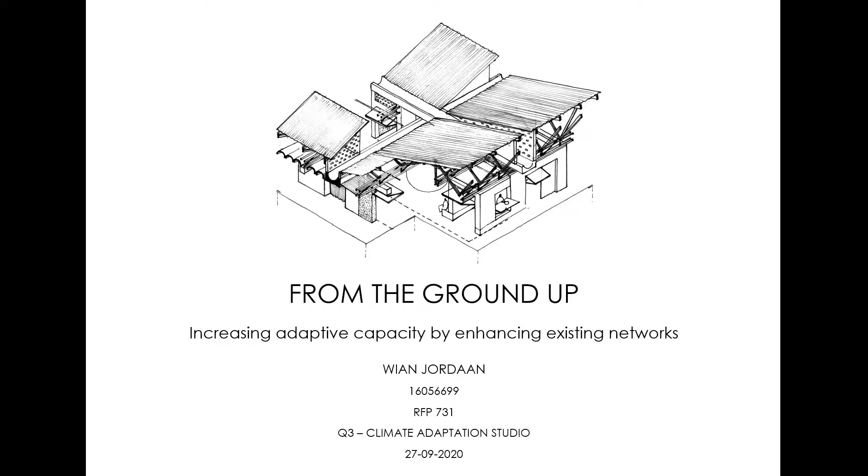Good morning, my name is Jordaan and the project is named From the Ground Up: Increasing Adaptive Capacity by Enhancing Existing Networks. The community of Melusi is highly dependent on external networks to provide economic and social services, which limits the community's capacity to adapt to the hazardous effects of climate change.

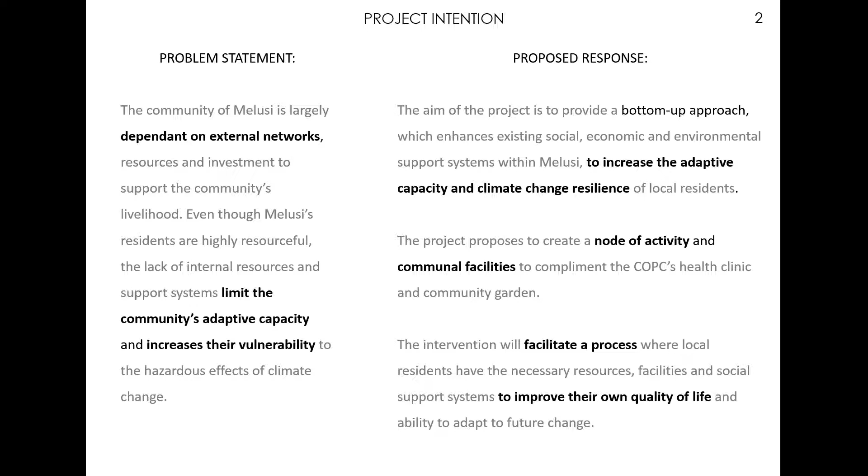The project proposes a bottom-up approach of enhancing existing networks within Melusi to improve the community's adaptive capacity and climate change resilience. The project will create a node of activity supported by communal facilities to facilitate a process where local residents have the necessary resources and social support networks to improve their own quality of life without the need of continuous intervention by external agents.

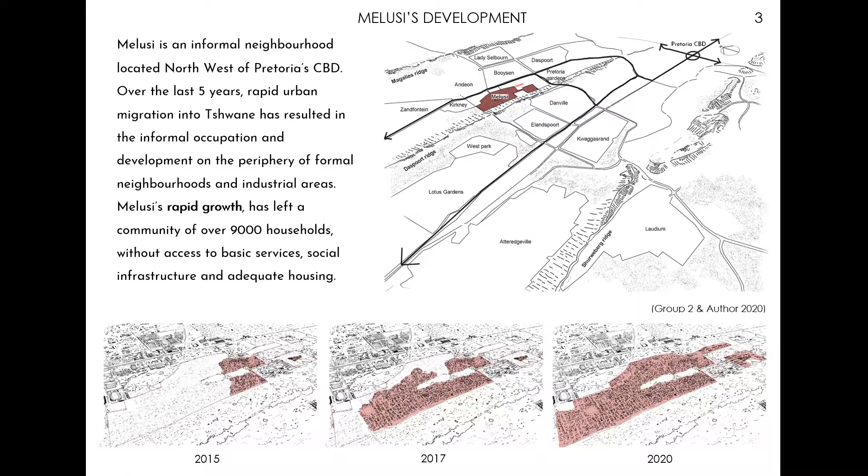Melusi is an informal neighborhood located northwest of Pretoria CBD. Over the last 5 years, urban migration into Tshwane has resulted in rapid informal development on the edge of formal neighborhoods. Rapid informal growth has left a community of over 9,000 households without access to basic services, social infrastructure, or adequate housing.

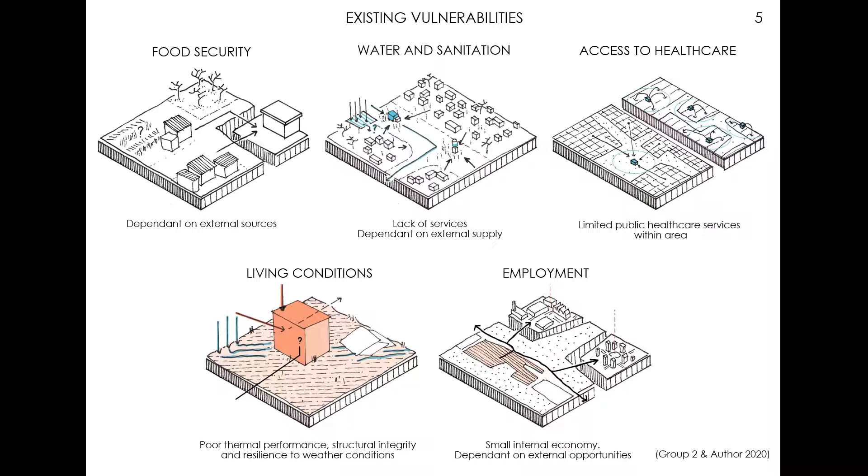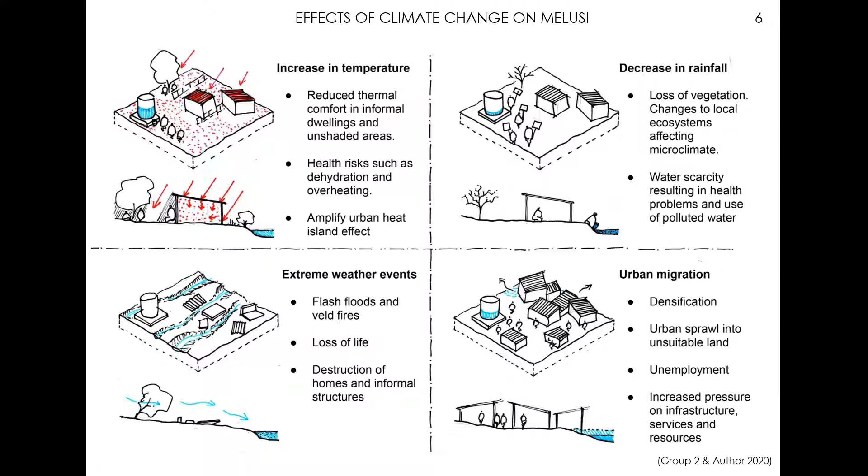Melusi's existing vulnerabilities indicate a high dependence on external sources for basic services and economic opportunities. The dependence on external systems make Melusi less resilient to the effects of climate change. Melusi is ill-equipped to handle the expected increase in temperature, decrease in rainfall, increase in extreme weather events, and increasing urban migration, which will exacerbate the community's existing vulnerabilities.

As a group, we analyzed how the effects of climate change could impact the community's quality of life and how these vulnerabilities could possibly be reduced with strategies such as increased flexibility, diversity, agency, and efficient technology.

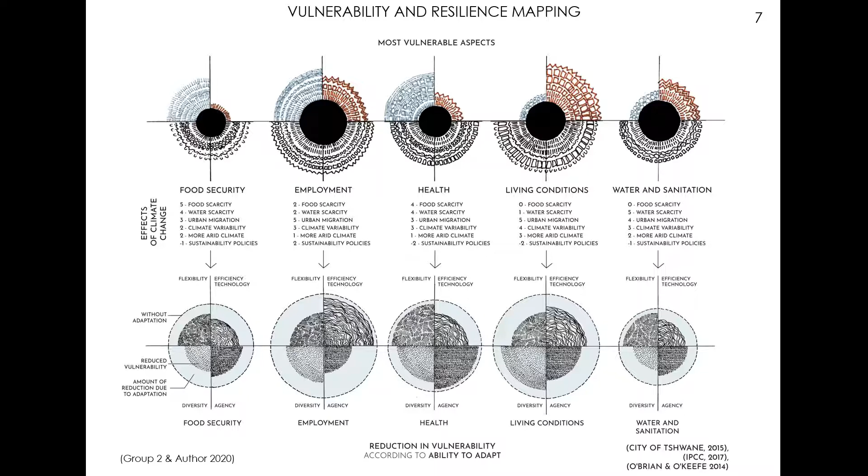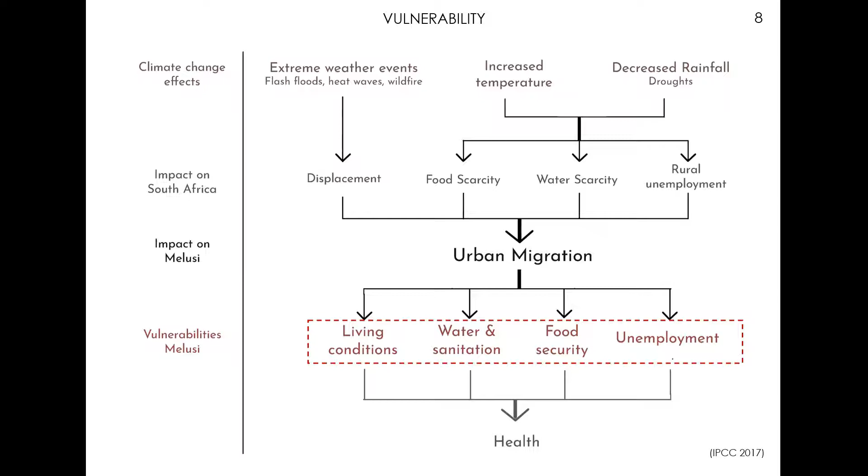The diagram indicates how the effects of climate change on rural communities will intensify the existing patterns of urban migration, which will exacerbate Melusi's existing vulnerabilities, such as poor living conditions, limited access to water, food insecurity, and unemployment. These 4 factors also contribute to health problems.

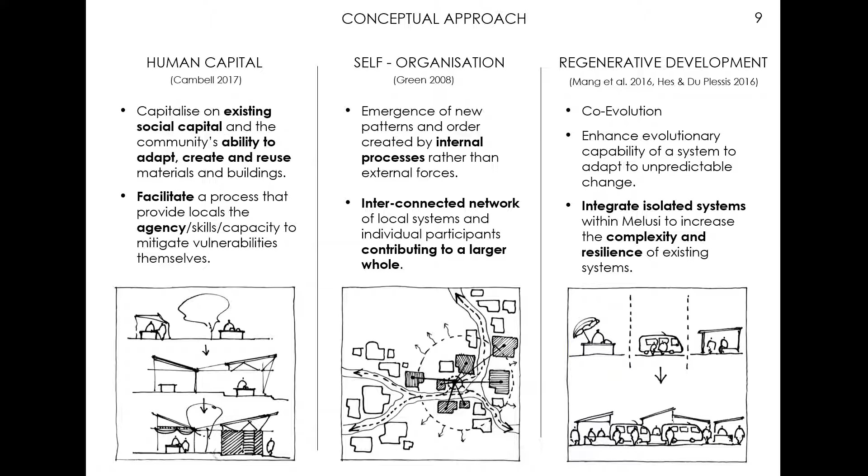The project will use the community's existing social capital and the ability to adapt, create, and reuse to facilitate a process of community agency. The project will focus on creating an interconnected network of internal processes by integrating isolated systems into a more complex and resilient system.

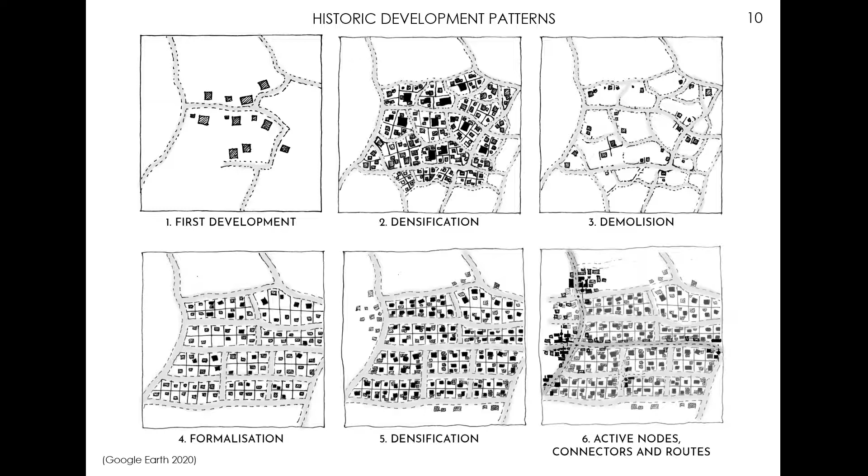An analysis of historic development patterns within Melusi indicated a continuous process of organic development, formalization, and then a resurgence of organic densification. Formalization has increased the informal sprawl and diluted economic and social activity.

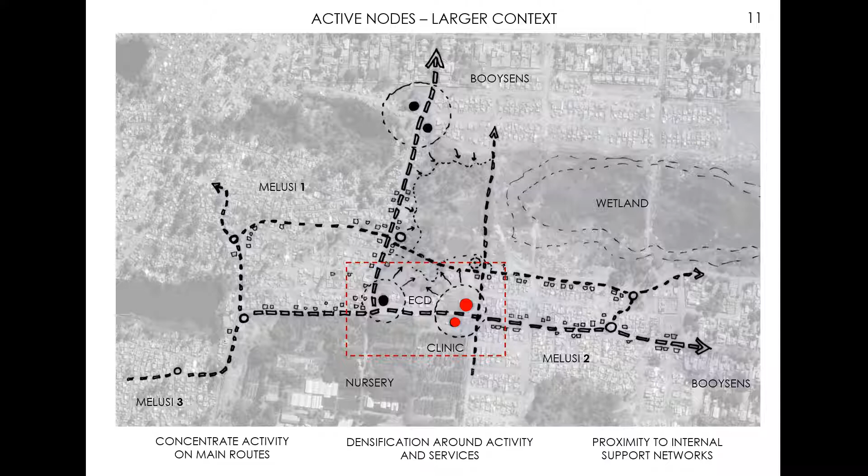The project proposes to create active nodes, routes, and connectors within Melusi to concentrate economic and social activity. This will stimulate densification and increase proximity to internal support networks and services.

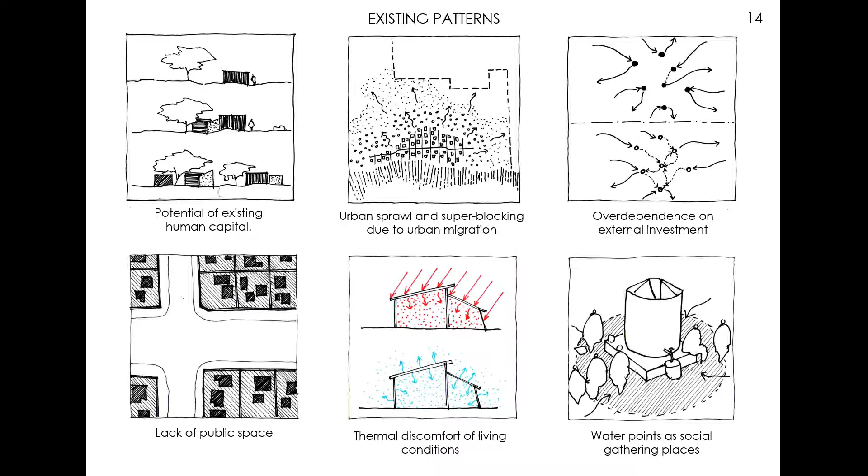The focus area is located at the intersection. This project intends to enhance existing systems such as the use of water points as social gathering places and the existing patterns of agency and appropriation.

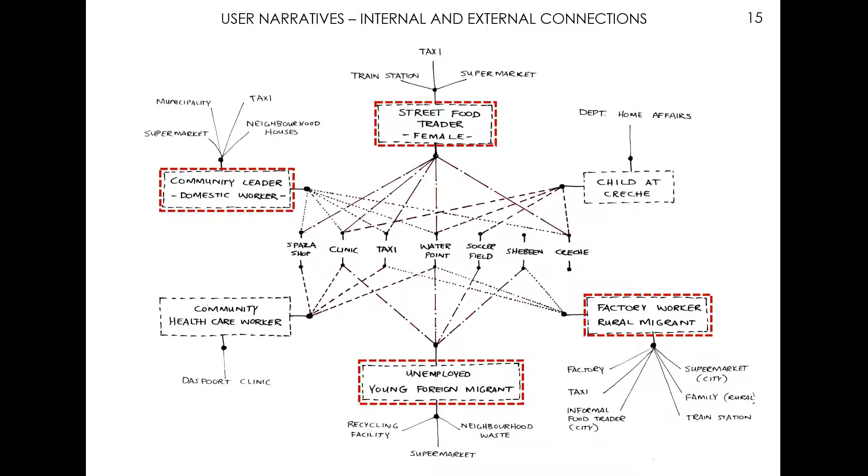The program aims to increase the adaptive capacity of the community by providing communal facilities to stimulate agency and provide support for existing processes. The program consists of 3 parts: community kitchen, a shared workshop, and informal market space.

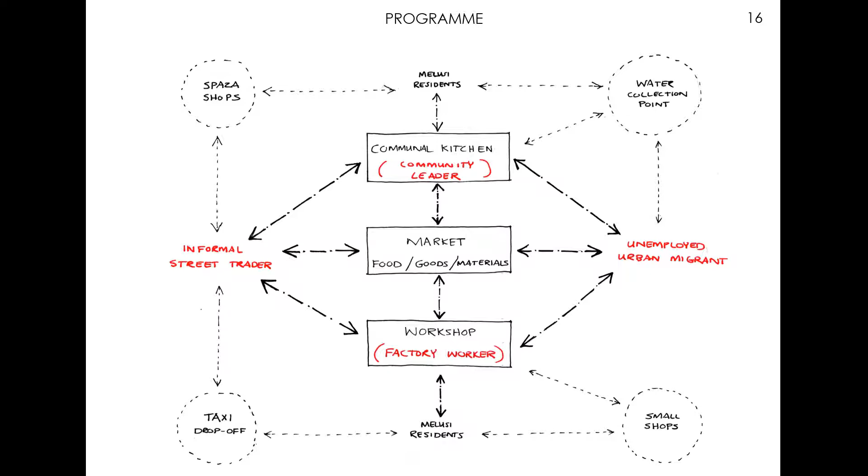These 3 components are supported by water collection points, a taxi interchange, and small spaza shops to integrate existing isolated processes and users into a larger system.

The diagram illustrates how the main components of the program respond to the vulnerabilities identified in the mapping. The identified vulnerabilities will worsen existing health problems within Melusi.

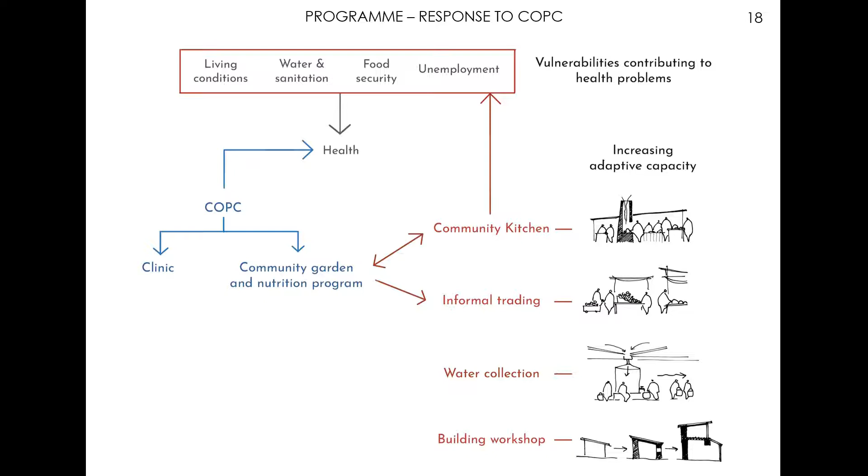The University of Pretoria COPC unit will provide a clinic to improve access to healthcare services. The proposed program provides complementary programs to the clinic and community garden by placing emphasis on addressing some of the underlying factors contributing to health problems.

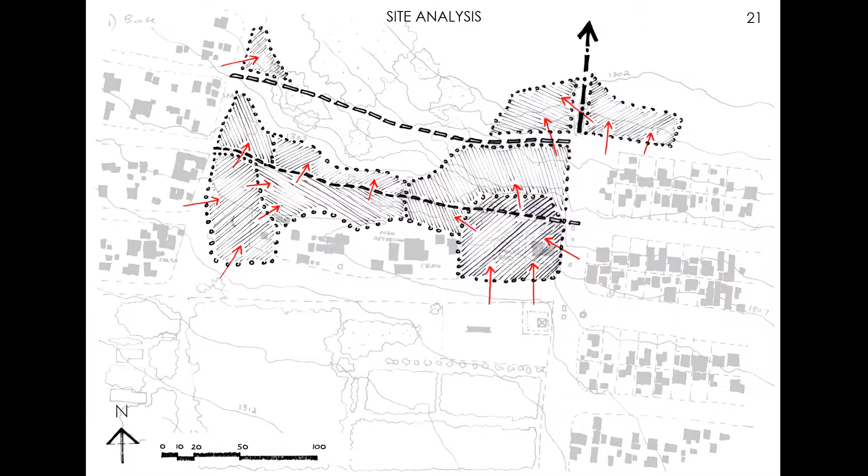A site analysis studied existing nodes of activity, main circulation routes, and expected sprawl due to urban migration. The proposed site will link to existing nodes such as the ECD centers, the clinic, the spaza shops, and water collection points.

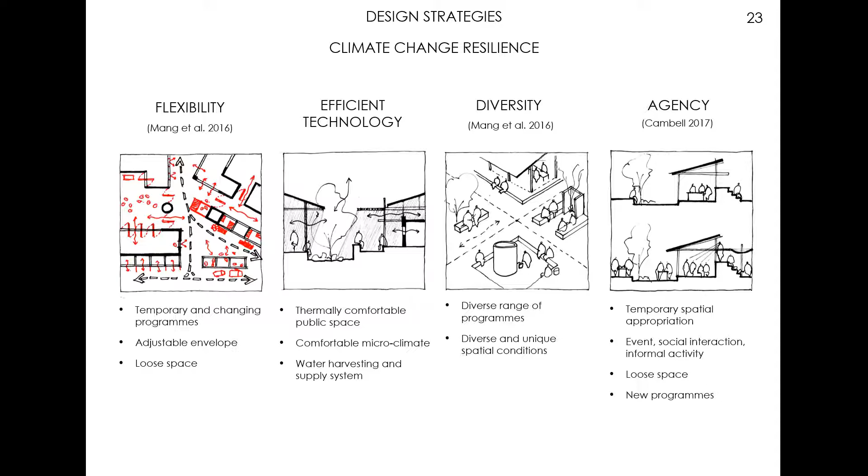The project proposes to increase the flexibility, improve the technology, promote diversity, and stimulate agency to improve the resilience of new and existing systems.

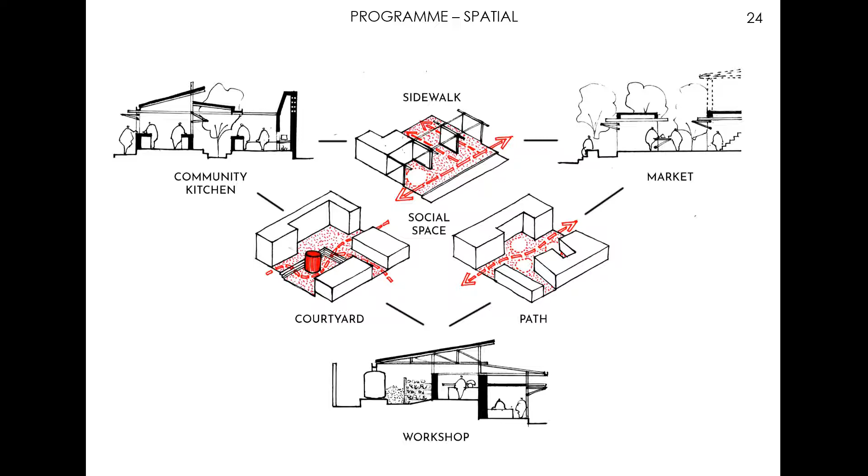Public and semi-public social spaces will link the 3 main programs: the use of courtyards, pathways, and activated sidewalks. The drawing illustrates the master plan.

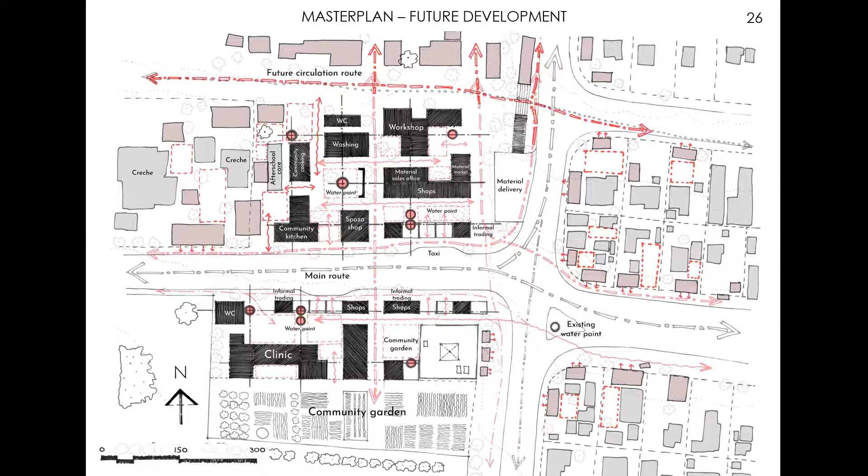The project anticipates future sprawl towards the north and densification around the intersection, which will create new routes and courtyards within the existing fabric. The proposed building system promotes appropriation and user authorship while increasing the thermal comfort to combat rising temperatures.

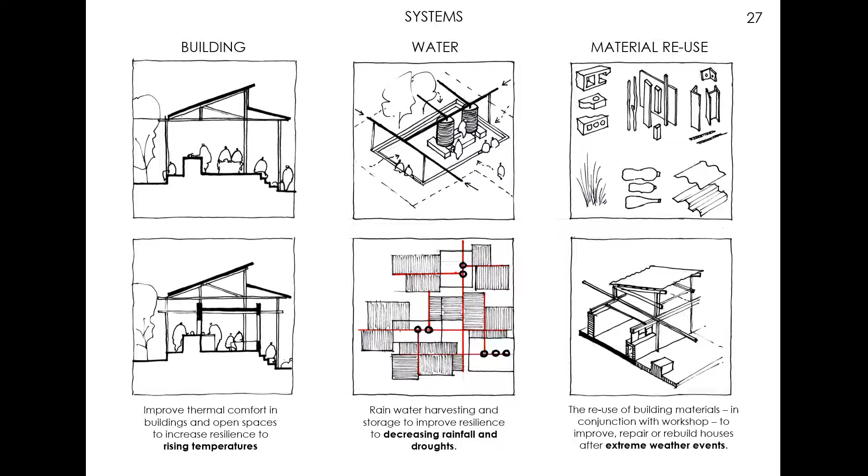The water system collects, filters and stores rainwater to improve resilience against decreasing rainfall and droughts. The project promotes the existing tradition of reusing local building materials to help residents quickly rebuild their dwellings after extreme weather events.

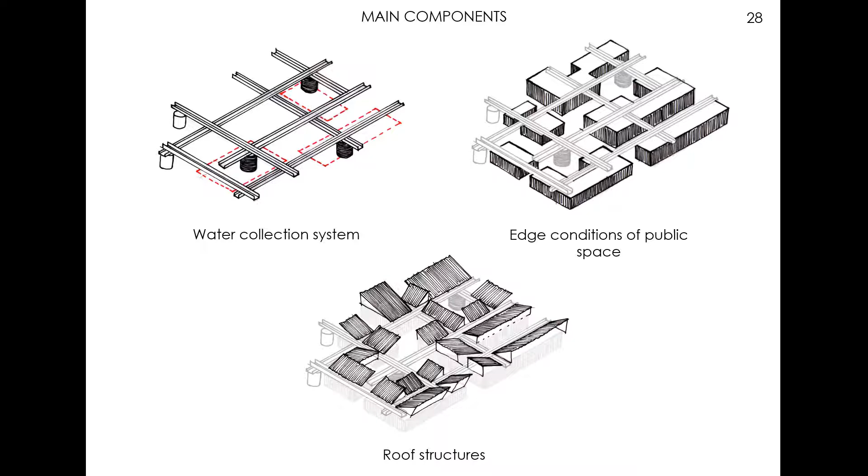The design consists of three main components: the water system with gutters and collection points, the fragmented massing defining the edge conditions of social public spaces, and a series of individual roof structures connected to the gutter system. The plan is ordered around three main courtyards with water collection points.

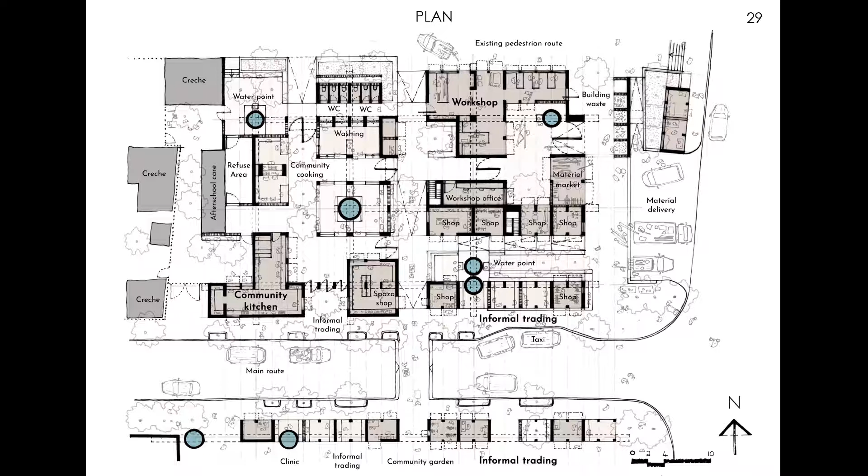The community kitchen links with the street, the courtyards and the ECDs. The workshop links with the courtyard, building material market and a delivery area. Shops and structures for informal traders link to courtyards, pathways and a taxi interchange.

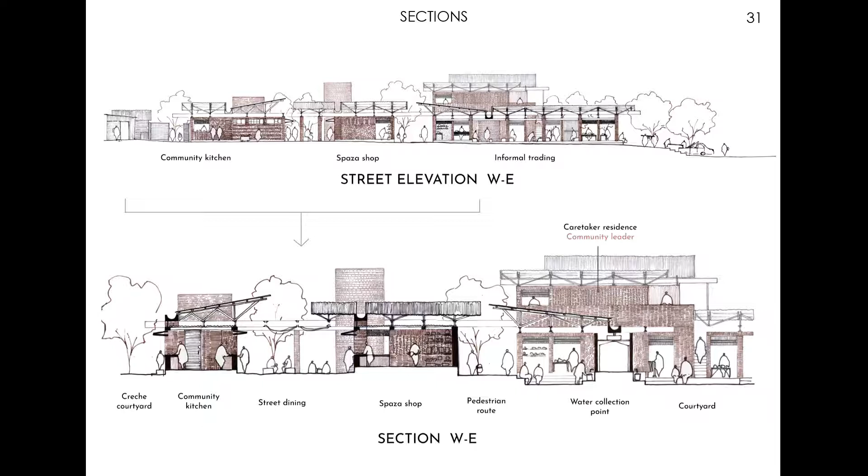The next few pages explore the incremental process of the design and construction process. The architect provides the water collection system, the basic structural support, the steel truss system, and the double roof system.

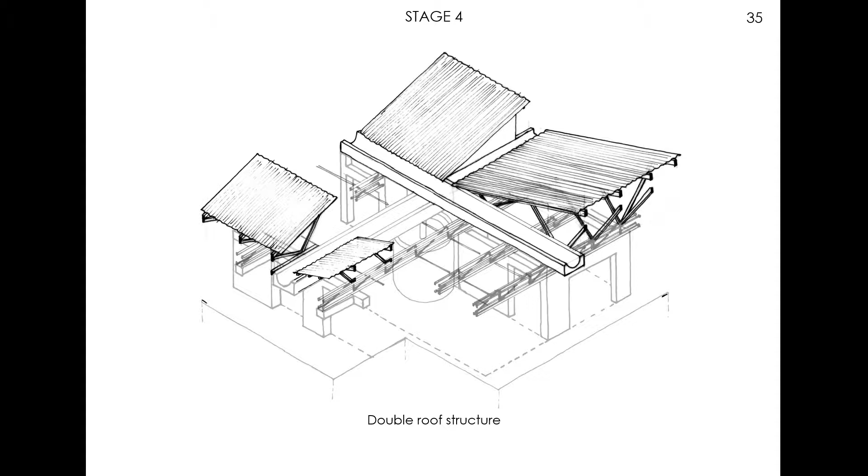Walls, folding doors, openings, and internal roofs are filled in by local participants. The users can then adapt, expand, and appropriate space according to their needs over time.

The double roof system provides thermal comfort by shading and ventilating the cavity in between, and provides flexibility and agency as the users can construct the internal roof according to their needs.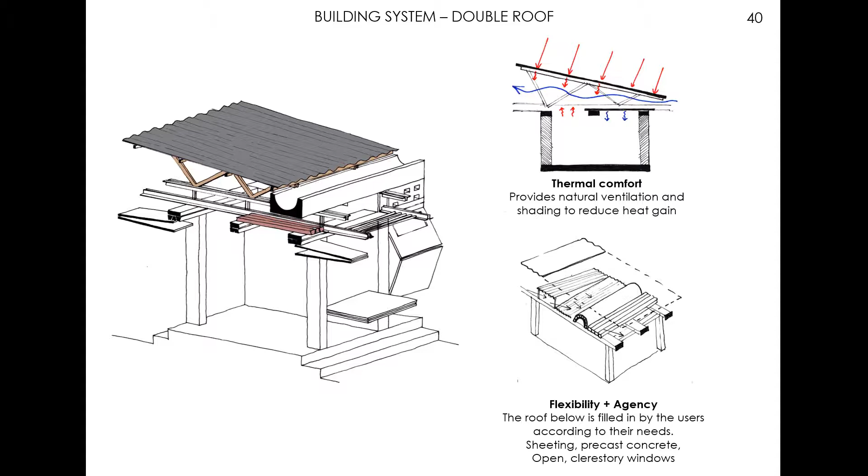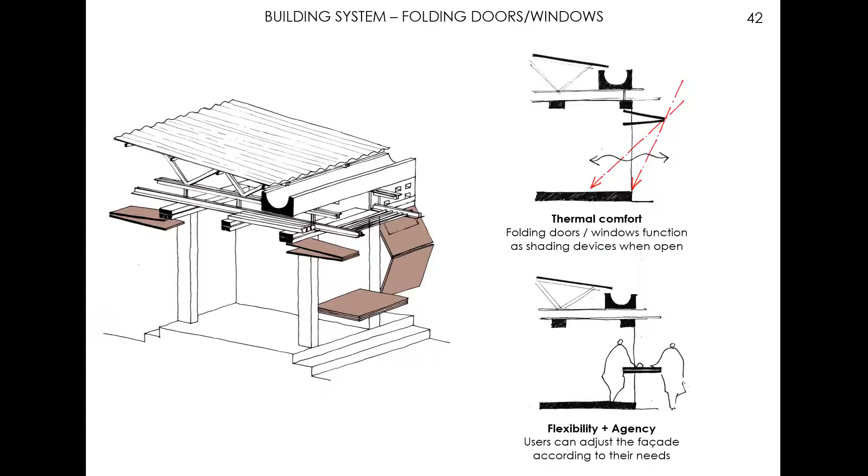The steel truss system improves the flexibility of the design by supporting future adaptation and new structures. The folding doors allow users to adjust their environments and act as a shading device when open. The reuse of found and locally available building materials promotes local authorship and participation.

The hybrid water system consists of two processes: collecting rainwater from rooftops, which is filtered by a passive slow sand filtration system to provide water for non-potable uses such as washing and irrigation, while municipal water supply provides clean, potable water.

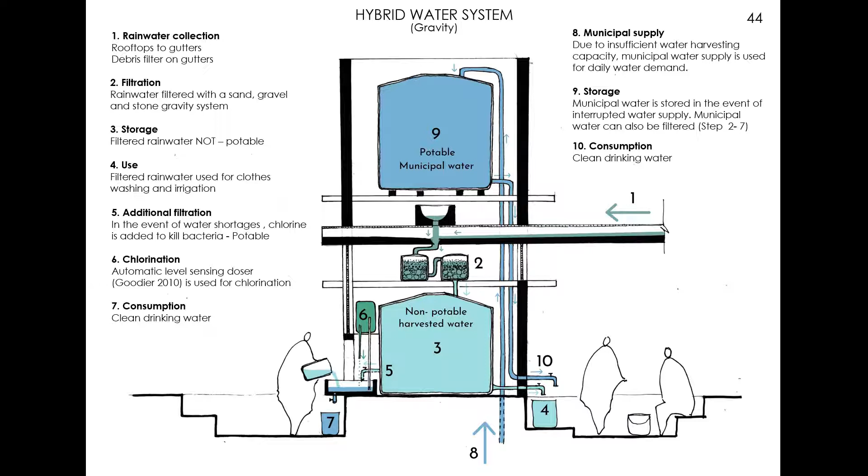To improve the system's resilience in times of drought and water scarcity, municipal water is stored to provide reserve during water restrictions or interrupted supply. The system has the capability to chlorinate filtered rainwater to turn it into a clean water source when needed.

The next few drawings will show how the spatial conditions and social systems of the design affect the four users' ability to adapt to climate change scenarios.

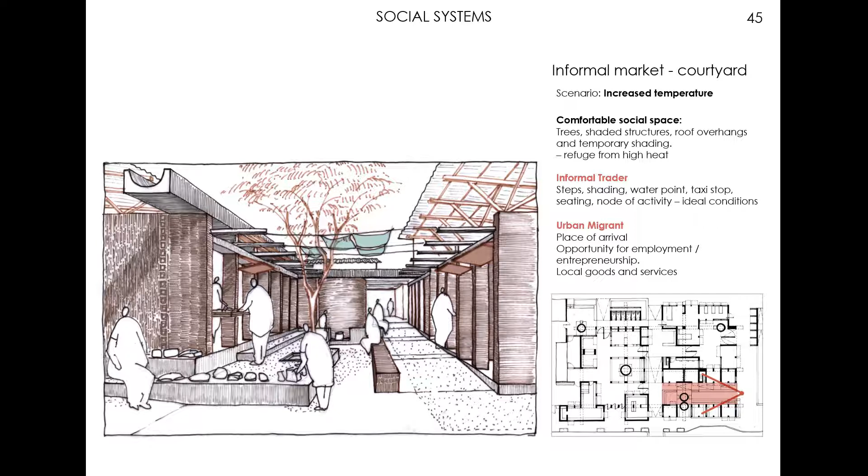In a scenario of increased temperatures, the informal market provides thermally comfortable spaces for social and economic activity, creating ideal conditions for the informal trader and access to local goods and services for the migrant upon arrival.

In a scenario of drought and food scarcity, the communal kitchen will get fresh produce from the community garden and provide the cooking equipment for local traders and local residents to cook, sell, and distribute food.

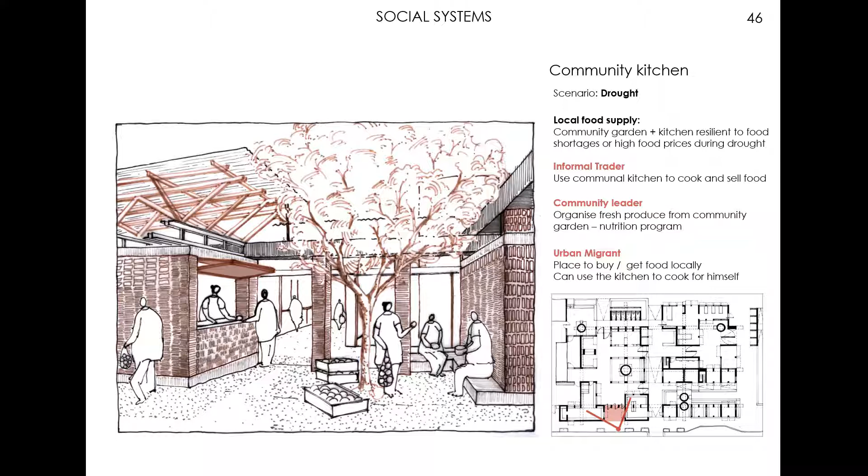In a scenario of decreased rainfall, the water collection points harvest, filter, and store rainwater. The collection points also act as a social gathering place, which will help urban migrants to integrate into existing social systems.

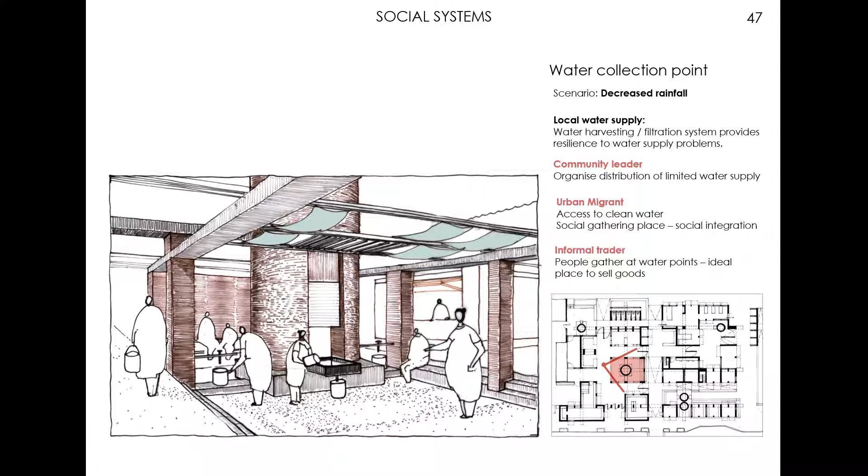In a scenario of displacement, the communal cooking facilities provide equipment and space for migrants and residents to cook for themselves if they no longer have the capability to do so at home.

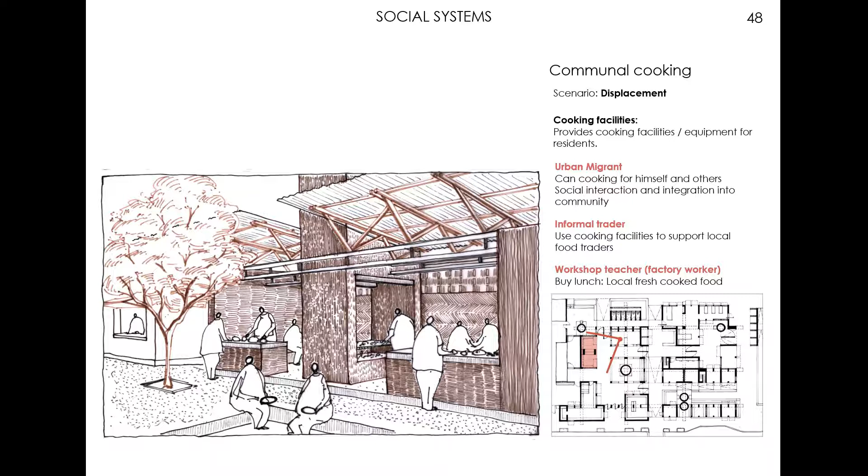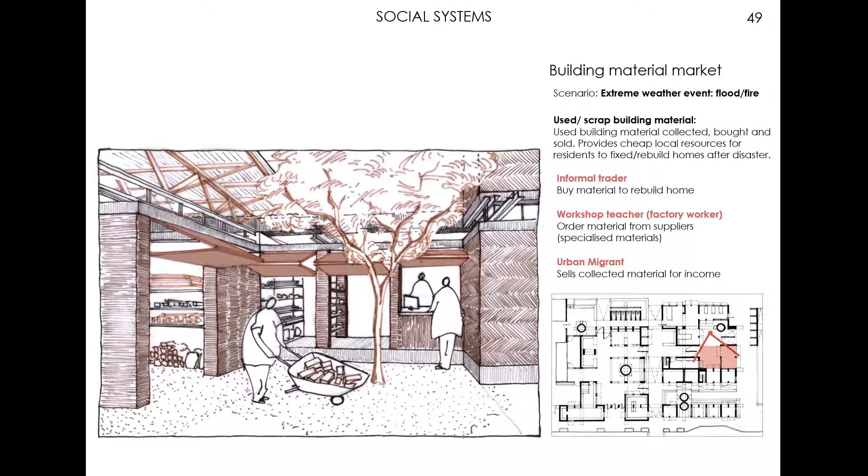In a scenario of extreme weather events, the building material market facilitates the exchange of used and new building materials to provide residents with local resources to fix, rebuild, or improve their homes after a disaster.

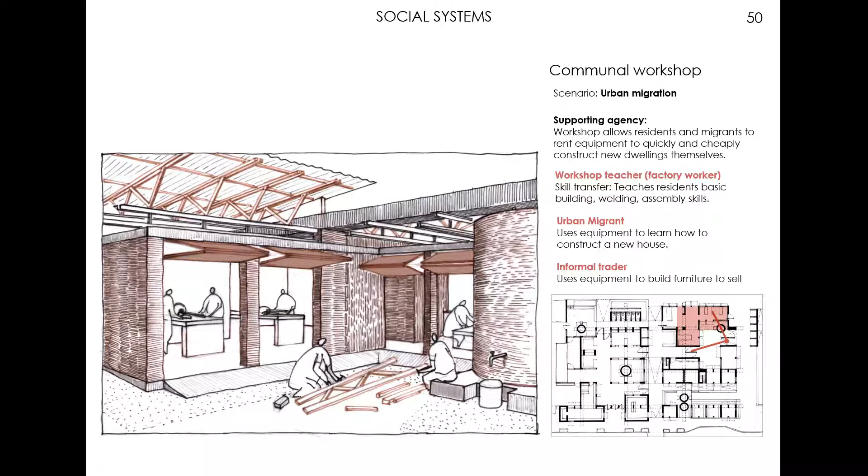In a scenario of increased urban migration, the communal workshop teaches migrants the skills and provides them with the equipment to quickly and cheaply build their homes themselves.

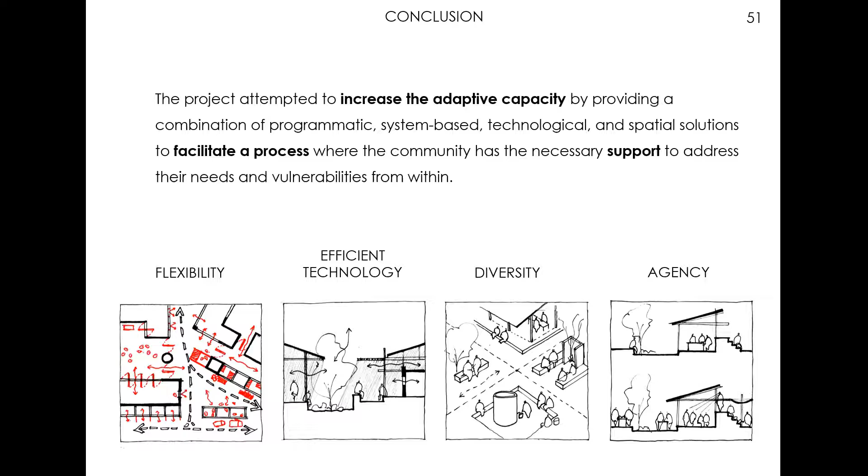In conclusion, the project attempted to increase the adaptive capacity by providing a combination of programmatic, systems-based, technological, and spatial solutions to facilitate the process where the community has the necessary support to address their needs and vulnerabilities themselves.

Critical reflection. We should be critical of any project, especially within an informal context, which attempts to improve resilience with the use of complex and highly specific building solutions.

It is clear that residents don't need excessive resources to be able to adapt to change. In reality, a site-specific program, participation from locals, and community ownership are much more effective means of creating adaptable and resilient systems.

Considering that community engagement was not possible in this case, the project does try to steer away from purely architectural and technological solutions to climate change by focusing on enhancing the existing social and economic systems.